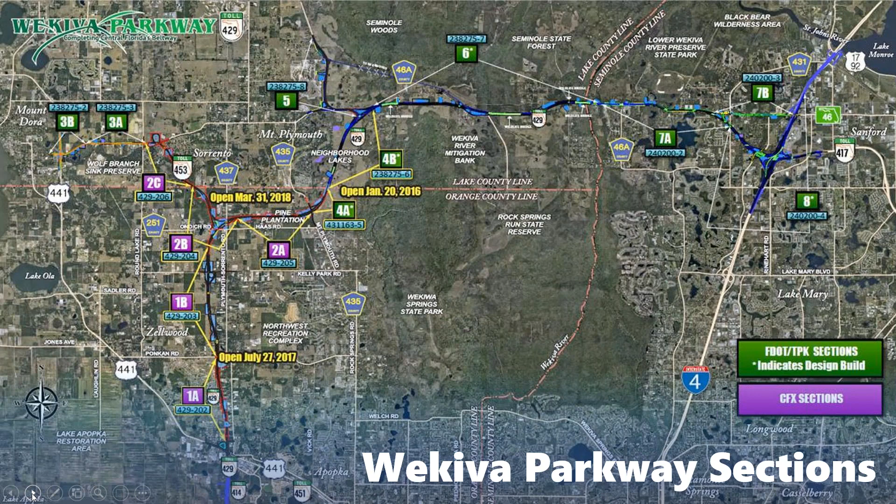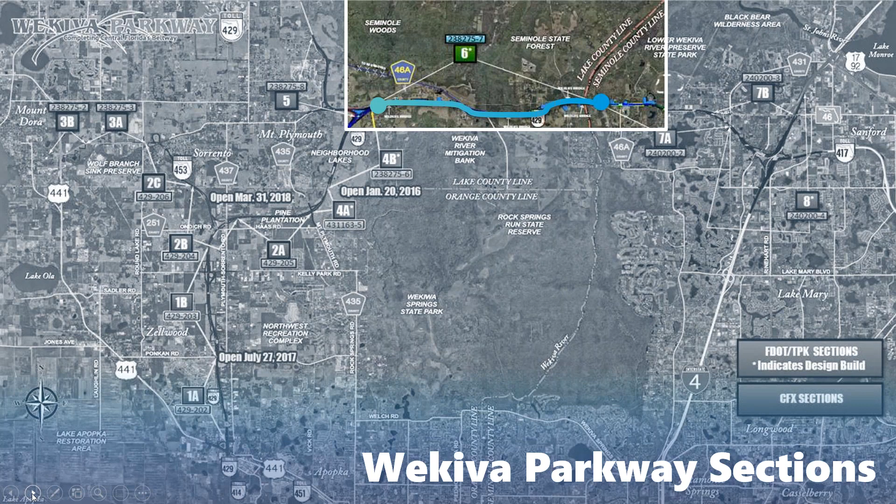So first, for those who aren't familiar, the Wekiva Parkway is a large parkway that encompasses the northwest quadrant around Orlando. It's approximately 25 miles and it's broken up into multiple sections. So today we'll be primarily focusing on Section 6, which is to the top of your screen. This is approximately a 6-mile corridor crossing over the Wekiva River, which is kind of the feature point of today's presentation.

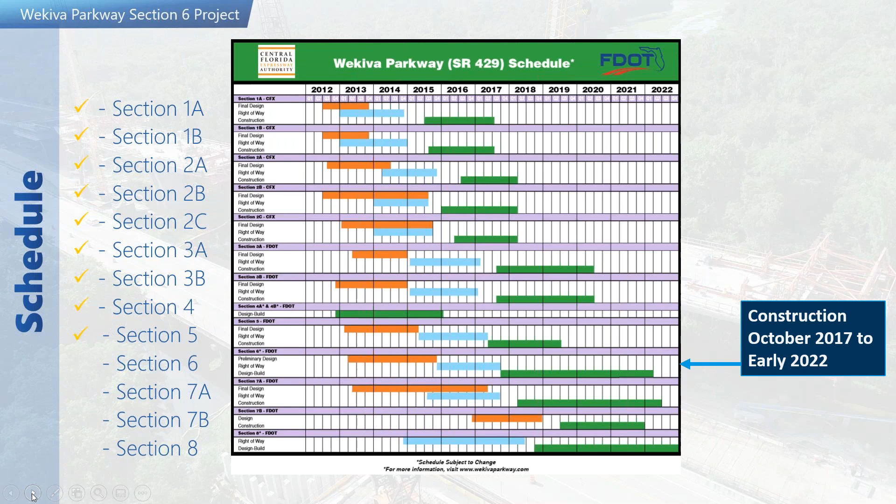The parkway is, again, made up of multiple sections. You can see the sections there on the left that have the check mark. These sections are all completed. Section 6, which we'll be focusing on today, is under construction, scheduled to be completed early 2022. And then Section 7A and 7B and Section 8 are concurrently under construction right now and will finish slightly after Section 6.

Let's look at some details of the project overall. Again, the overall Wekiva Parkway is $1.6 billion, approximately 25 miles. It's that northwest quadrant beltway that will go around Orlando. The Section 6 project is 6.1 miles long. It consists of a limited access toll facility along with a non-tolled service road for local traffic. That was very important, and the department wanted to make sure that there was a non-tolled option for local traffic. All the tolling is electronic tolling. There'll be no toll plazas along the way.

It also includes a pedestrian path and trails. This area is very rural in nature, and there's a lot of hiking and trail walkers that use this facility. It was important that the contractor coordinate with adjacent Wekiva Parkway sections because we have a section on either end of the project. So that's been a real important aspect.

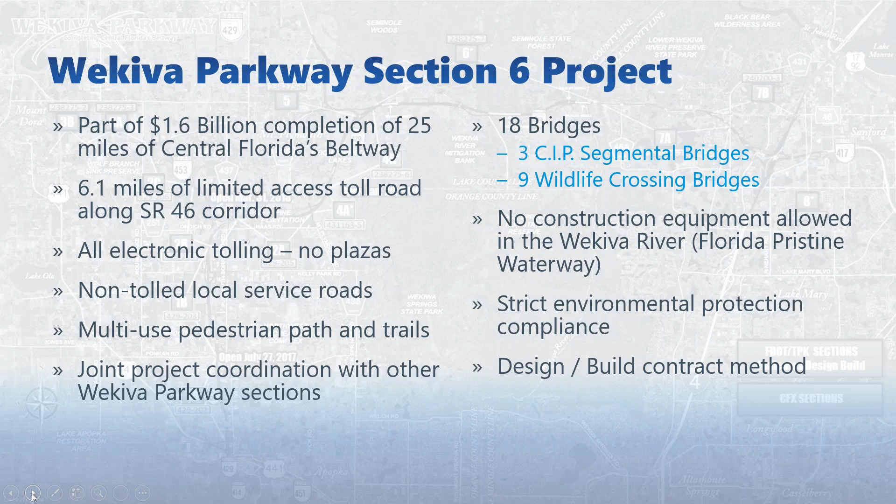There are 18 bridges on the Section 6 project, 3 of which we'll primarily focus on, which are the cast-in-place, balanced cantilever segmental bridges. There are also 9 wildlife crossing bridges and 6 bridges that are over local traffic roadways. No construction equipment was allowed in the river. We've had strict environmental requirements and compliance to those requirements on this project. And this project was designated as a design-build contract method. You can see the corridor largely runs east and west, about an hour north of Orlando.

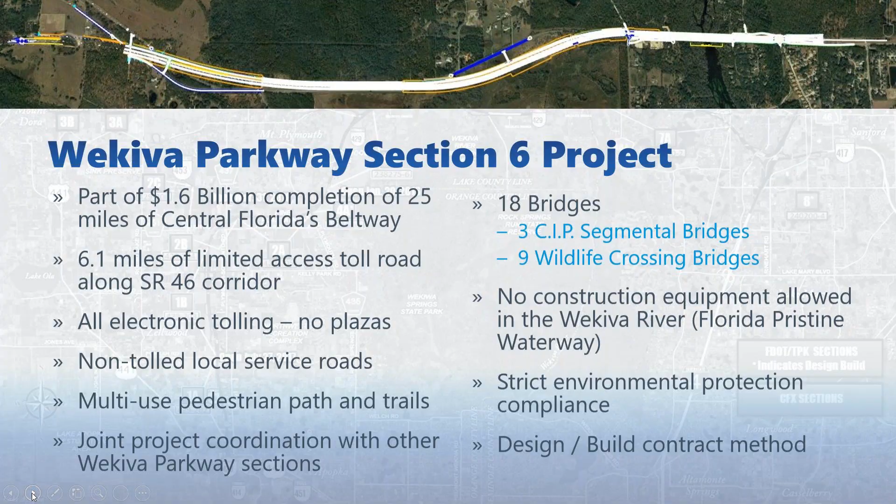Now Garrett's going to talk a little bit about their relationship with Finley and some of the elements of design. Okay, again, good afternoon. I'm going to discuss some key elements of the design process and introduce a few acronyms along the way that some of you may be unfamiliar with.

As Rob mentioned, Finley Engineering Group out of Tallahassee, Florida, is the design partner for the segmental portion of the project. Per the project RFP, or the request for proposal, the design-build team was required to provide an IPR, or independent peer review, at the 90% phase submittal and the final submittal for the segmental bridges, which fell under the Category 2 bridges in the PPM, or the Plans Preparation Manual. The IPR was intended to be a comprehensive, thorough verification of the original design.

The project team is also utilizing the ERC, or the Electronic Review Comments System, to track the entire review process, both comments and responses, for plan reviews and project submittals in a database. All comments and responses reside in one location, allowing any user easy access to all or partial review on demand. The system allows project managers to easily track all comments and responses from all reviewers and consultants at any time during the process.

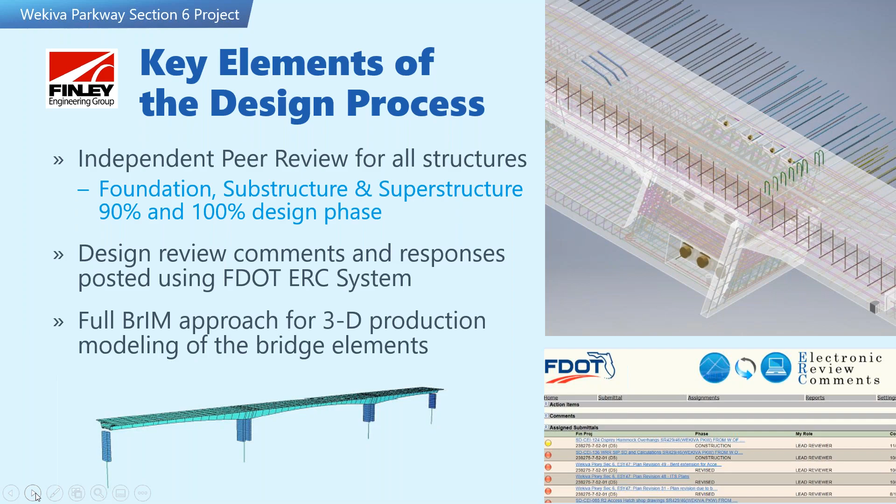The Wekiva River bridges consist of a westbound and an eastbound bridge as part of the tolled State Road 429 Beltway and a non-tolled bi-directional bridge for local traffic. As seen in the typical sections, each bridge includes 2 12-foot travel lanes and wide shoulders with the ability to accommodate additional lanes to the toll roads with future expansion. The local service road also includes a 12-foot sidewalk for viewing of the pristine Wekiva River.

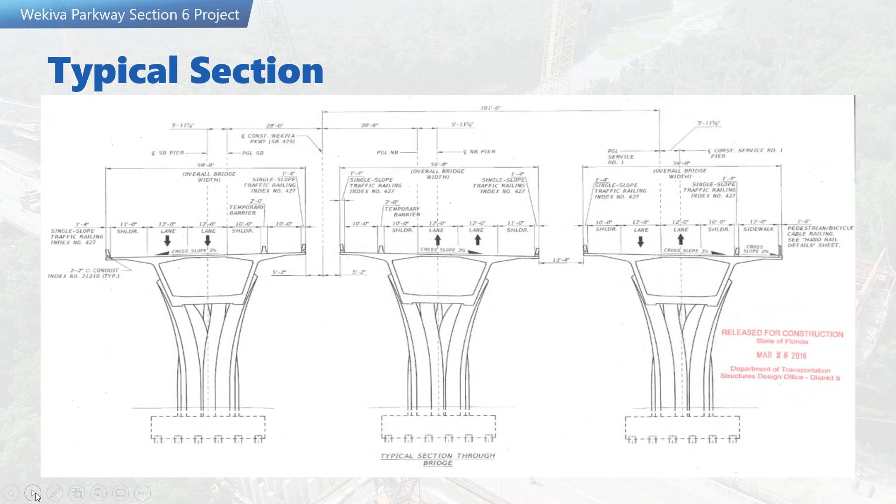The segmental superstructure of each of the 3 bridges is comprised of 2 38-foot long pier tables, 10 16-foot long segments extending downstation and upstation from each of the 2 pier tables, and 2 70-foot end spans that bookend the segments. 3 closure pours between 8 and 9 feet in length join the elements together to complete the full 880 feet in length.

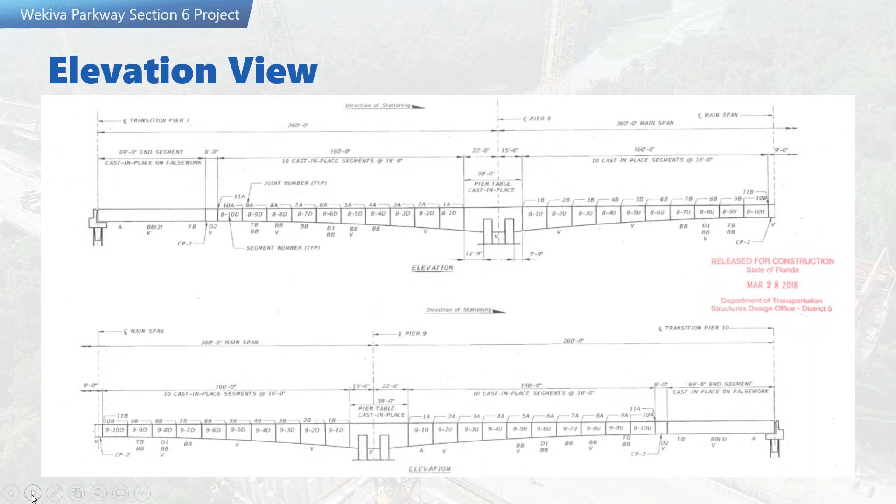So we'll go through a little bit of the foundation and substructure and then get into the good stuff. The 3 Wekiva River bridges accounted for 641 24-inch square precast concrete piles that ranged anywhere from 40 feet to just over 100 feet in length for a total length of 40,000 feet in piles.

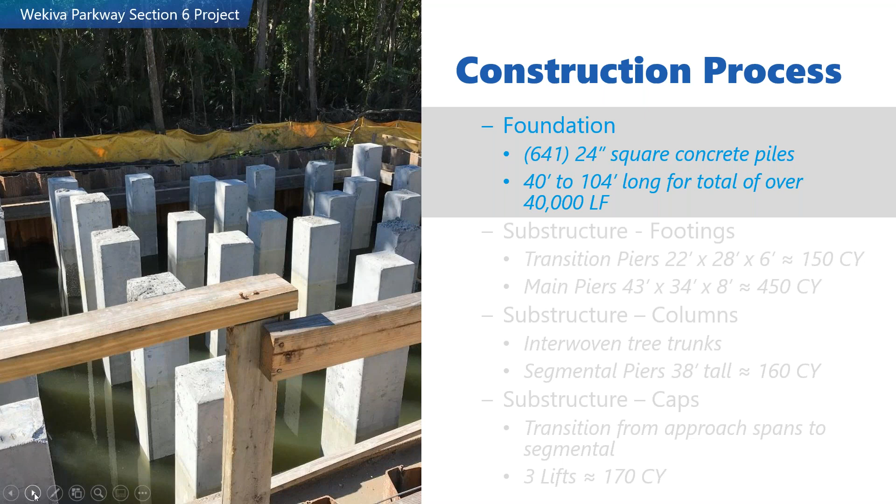All of the substructure concrete placements fell under the mass concrete category, and temperatures were continuously monitored using wireless sensors that provided real-time data to ensure that the concrete cured properly. This included the footings, columns, and caps. Each of the footings for the transition piers were approximately 150 cubic yards in concrete, and the footings for the 6 main piers averaged roughly 450 cubic yards.

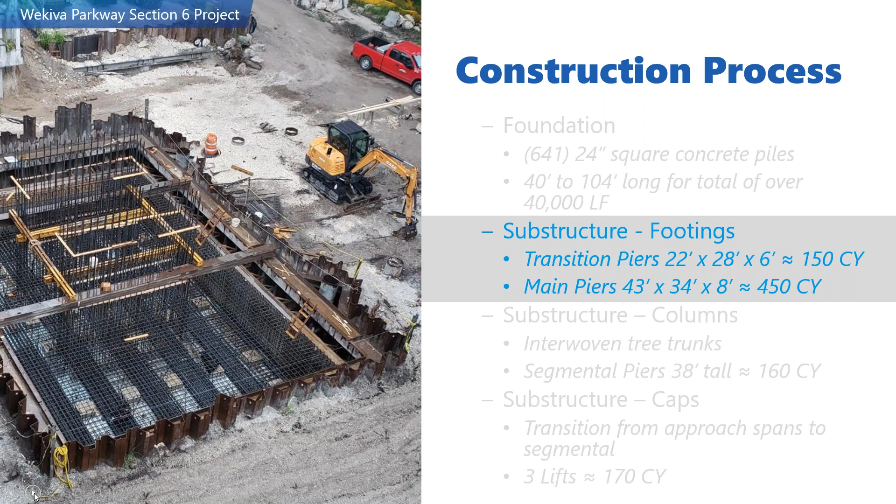The design build team included the use of tree shapes in all piers at the Wekiva River bridges to fully capture the preferred theme of the celebration of trees on the river's edge. We included that as part of the aesthetics package in our technical proposal. The columns for the segmental piers averaged 38 feet in height for a volume of 160 cubic yards.

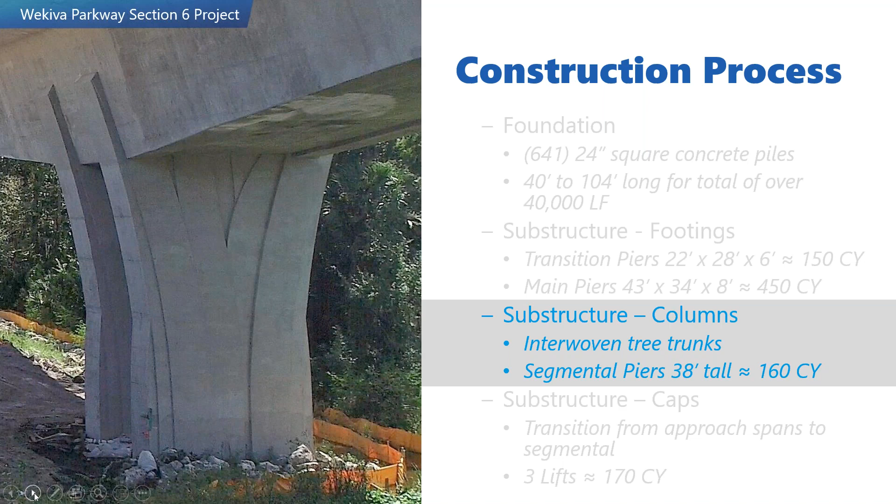The caps cast at the transition piers served as the shift between the approach spans, where you can see the FIB 78 girders in the background, and the segmental spans that begin with the end span. The caps averaged 170 cubic yards in volume, divided out over 3 lifts. The addition of the multi-rotational pot bearings underneath the end spans and the finger joints at the top of the caps allowed for movement between the 2 superstructure types.

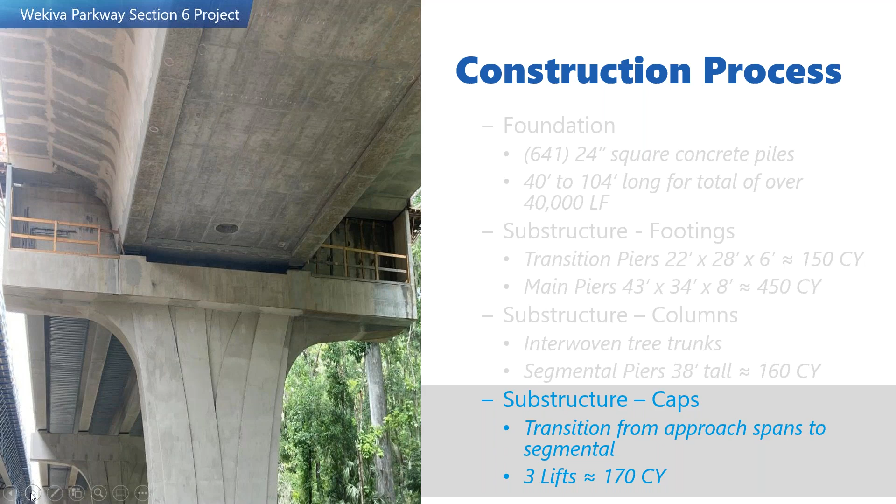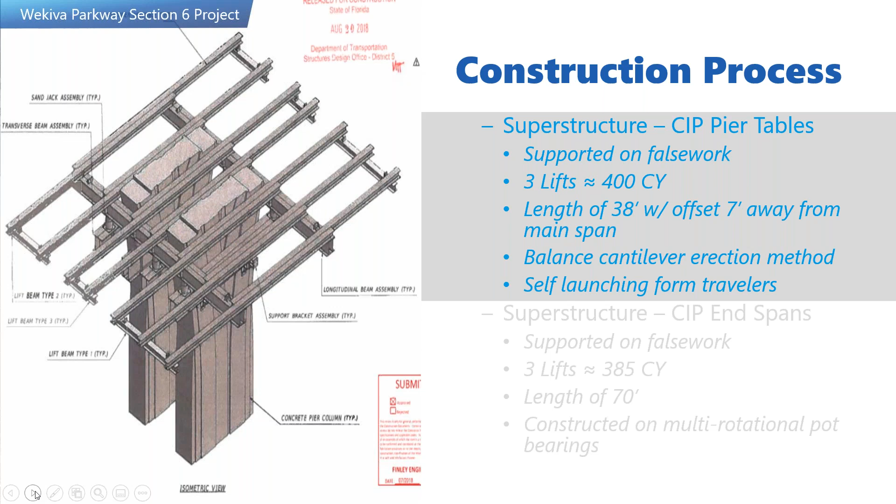The pier tables were cast in 3 lifts. Lift 1 was the bottom slab. The second lift were the walls and the diaphragms, and then the top slab for the final lift, for a total of approximately 400 yards. Again, the pier table spanned 38 feet in length with a 7-foot offset away from the main span over the river as part of the balanced cantilever erection method. Self-launching travelers were erected on top to cast the segments in each direction.

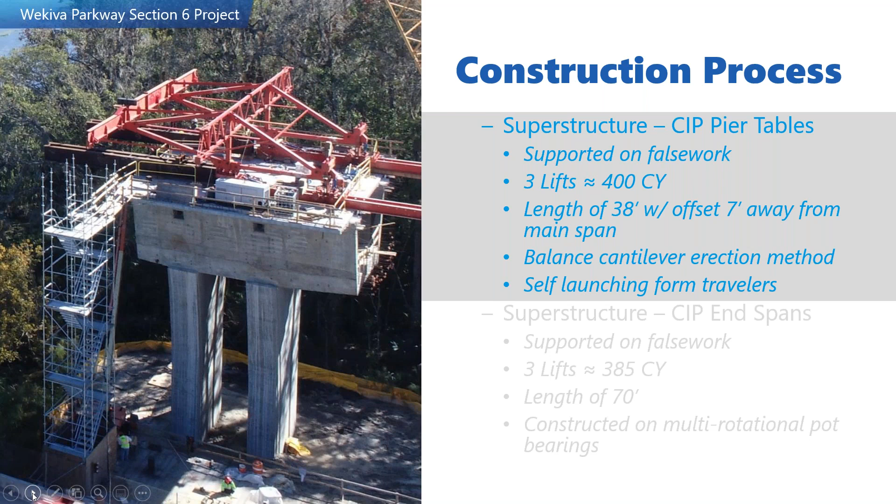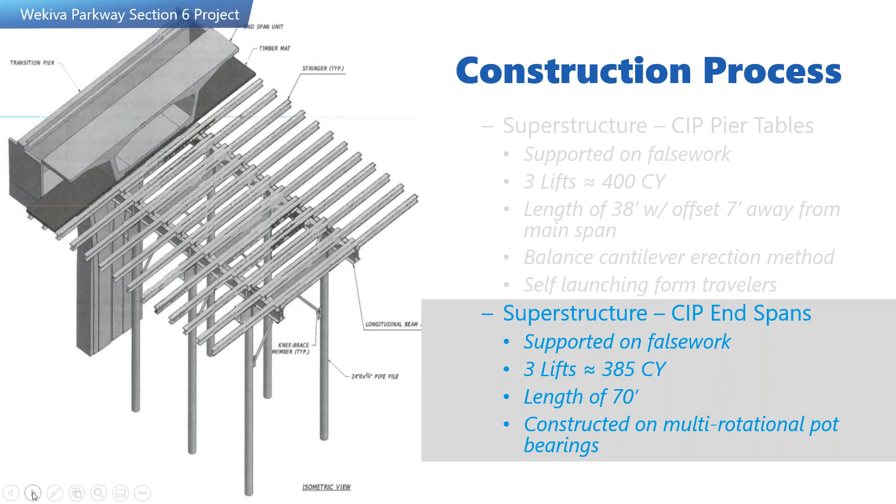The end spans were completed in 3 lifts as well, for a total of just under 400 yards per location. Each end span was just under 70 feet in length and was constructed on the multi-rotational pot bearings to allow for movement.

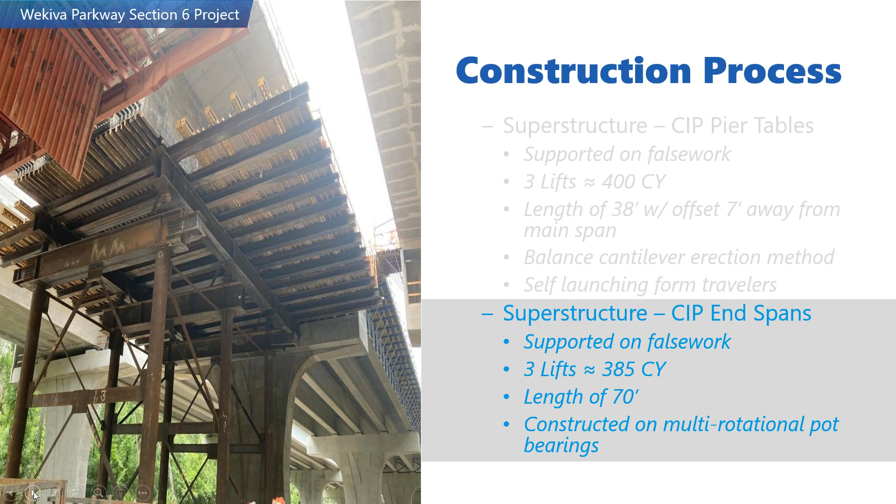As far as the segments, each of the 3 bridges included 40 segments, with 10 downstation from the pier table and 10 upstation from the pier table on each side of the river. The depth of the segments and the base width both varied in dimension from segment to segment. The top deck remained a consistent 60 feet throughout each bridge, and all 120 segments were cast in 16-foot lengths.

Due to the variability in the shape and size of the segments, the concrete volume ranged from 120 yards at each pier table down to 80 yards towards the end spans and the midspan.

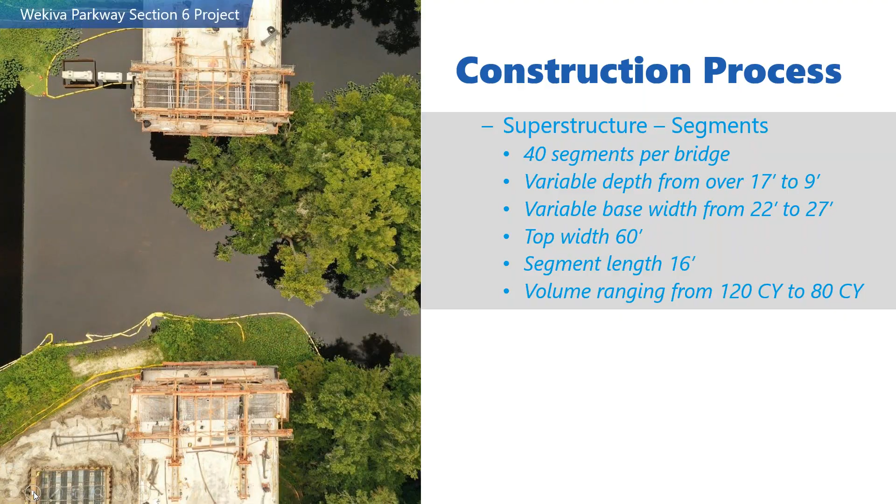All right, thanks, Garrett. As we discussed the cast in place balanced cantilever method, one integral part of that is the form traveler, which you can see in red. The form traveler really enables this type of construction method, and it was chosen due to the fact that there was no equipment allowed in the river, so no bridge foundations. So to really achieve that 360-foot span across the river, this was one of the sole construction methods to achieve that.

So looking at the form traveler, it's made up of different components, as you can see in this schematic. There's a bottom support, which holds the weight of the concrete and the reinforcing steel. And then there's the top support, which supports the top deck. It has variable level work platforms also for the workers.

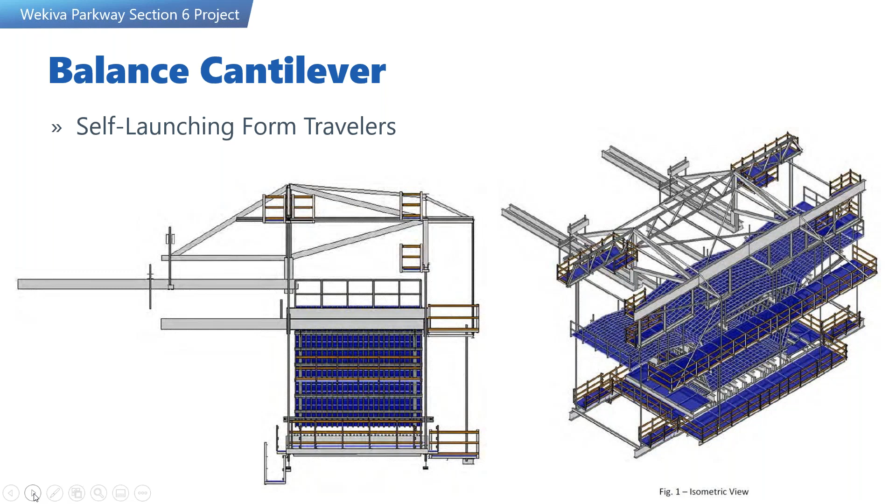From the side view, you can see on top, there's an A-frame. These particular travelers have two of those frames. They're commonly referred to as the horses. And these are what support the overall weight of the segment and the traveler itself. The longitudinal beams in the background are projected forward, and this allows the traveler to move forward or backwards, providing the aspect of self-launching. That way you don't have to have any equipment underneath or above to facilitate this casting.

Now we're going to take a look at a short video that sort of graphically depicts what goes on during balanced cantilever construction.

All right, thanks, Greg, for showing that video. Hopefully everyone got a better idea now of the balanced cantilever cast in place construction method. Moving on, we're going to look at some progress update photos. So last year at about the same time, this presentation was given as a 2020 update. So what we thought we would do is keep the 2020 slides and then sort of show a contrast with 2021 so that the audience can see the progress that's been made in the past year.

So this photo was taken about a year ago with our drone, and you can see the form travelers there in red. There are 2 pairs of them, and they're casting segments for the westbound bridge, which will be part of the toll facility 429. On the right, you can see the service road bridge. The construction is already completed, and it has 2-way traffic, again with that pedestrian walkway on the right-hand side. The middle bridge, construction had just begun for that bridge, and the pier tables were under construction at different stages there.

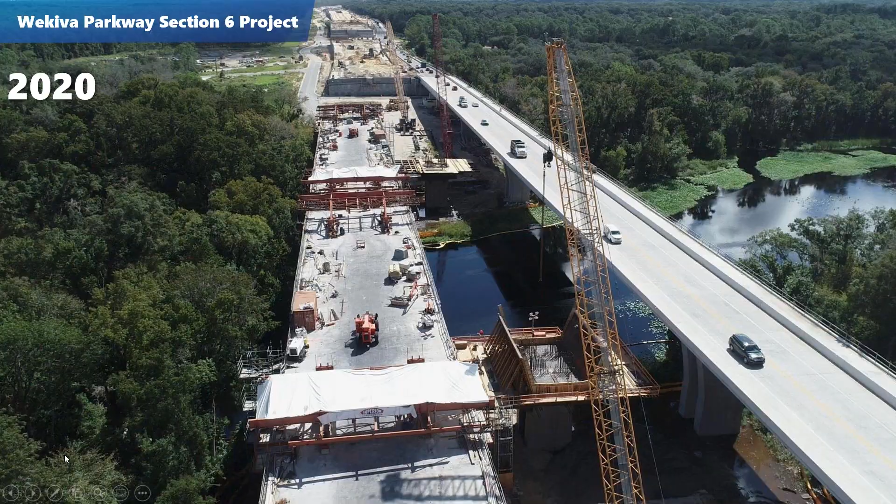So moving forward to this year, you can see now this photo is looking east, and the westbound bridge is largely completed. All the segmental work is completed on that bridge, and the eastbound bridge is nearing completion. Again, this photo shows the 4 form travelers that are casting segments opposite of the pier, with only several, I think at this time there are about 8 segments remaining.

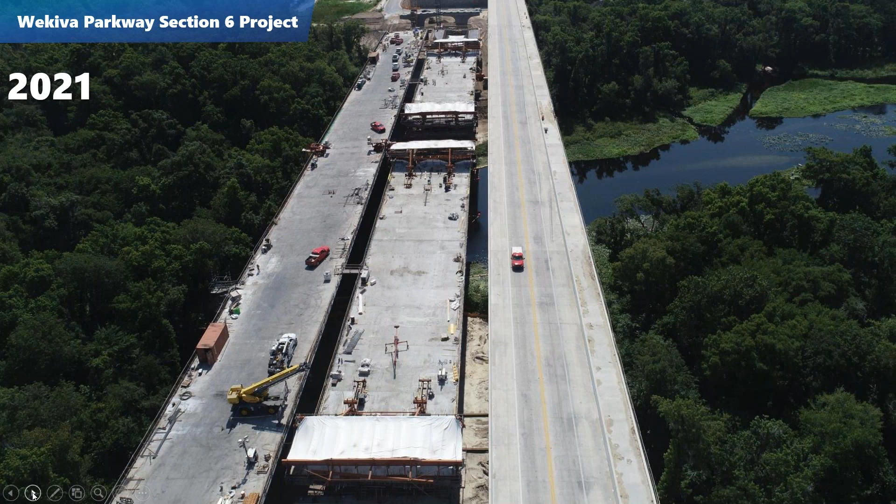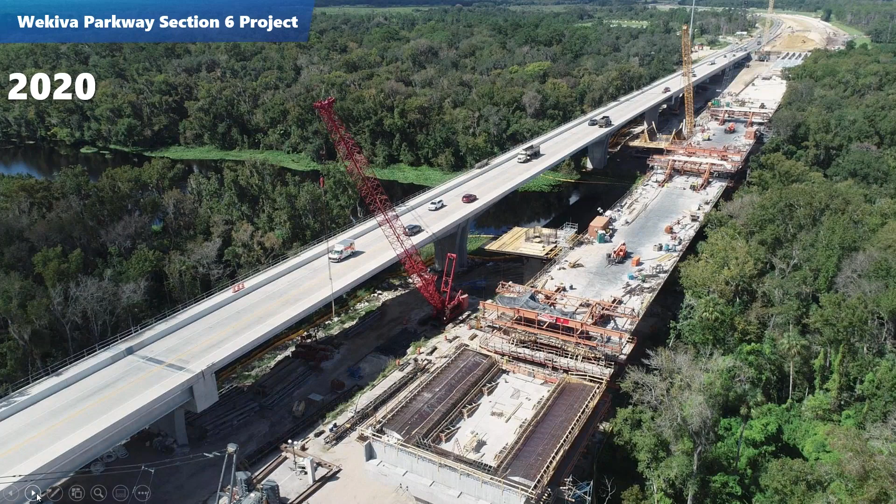So this photo, again from 2020, shows the progress. This photo is looking sort of mostly to the west. You can see the end span segment at the bottom of the photo being constructed. At this time, as Garrett mentioned, that is constructed in 3 concrete lifts. So the second and third lifts are being worked on there, reinforcing steel being installed.

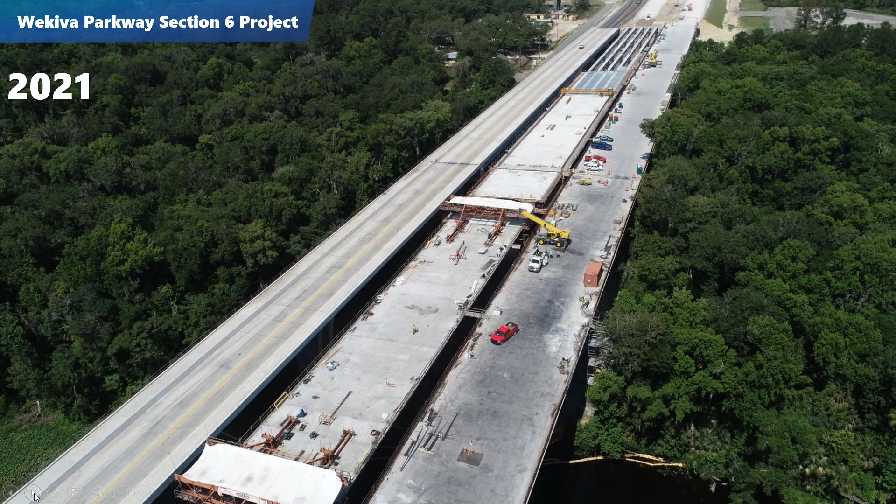This is a good shot of the river underneath, again from 2020. You can see the broad spans of this main span and the fact that there's no intrusion into the waterway with this construction method. In the photo from 2021, currently, all the pier table work is complete. There's a little bit of patching and rubbing going on the westbound bridge to your right, and the eastbound bridge is continuing construction.

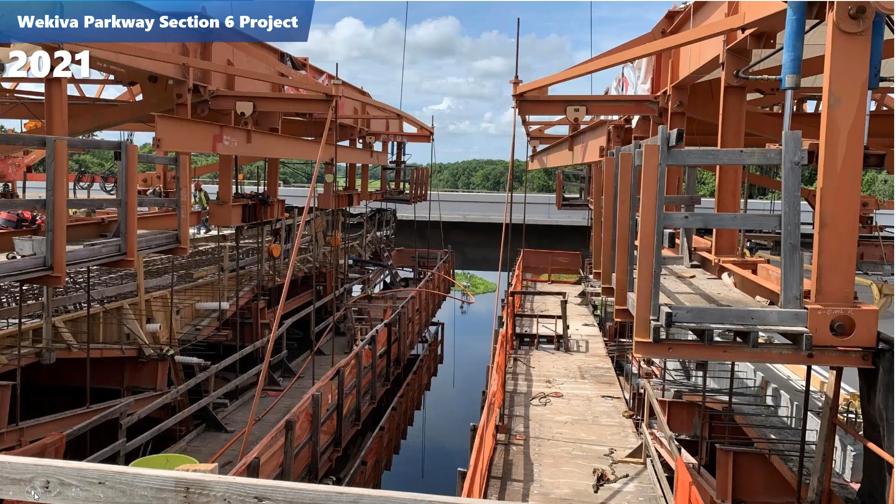This photo shows the progress in 2020 as we're coming into the main span closure with approximately 32 feet left to be constructed. And this photo was just taken several days ago with approximately 25 feet until this main span closure, till the 2 tips of the cantilevers meet.

We also use a wireless weather station that we have mounted on the roof of our office trailer. This connects to a Bloom Sky app that everyone has on their phone. It'll show you a real-time photo of what the sky looks like, as well as temperature, wind speed, humidity. So that's been very useful to have on the project.

If you are away from the project site, at any time you can click on that app and it'll show you what the conditions are, which is very helpful. Central Florida, especially in the summertime, we get these big thunderstorms that roll through. So it helps everyone stay connected with what's going on.

In 2017, we implemented the use of wireless tablets, iPads, and Samsung tablets on the project. This allows the inspectors to do their field work electronically. They can also utilize digital signatures. We didn't realize how important this was going to be until 2020 hit, and we were encouraged to not hand off paperwork from person to person. And so the fact that all our inspectors were already using this type of technology was very beneficial and helped us comply with the safety regulations.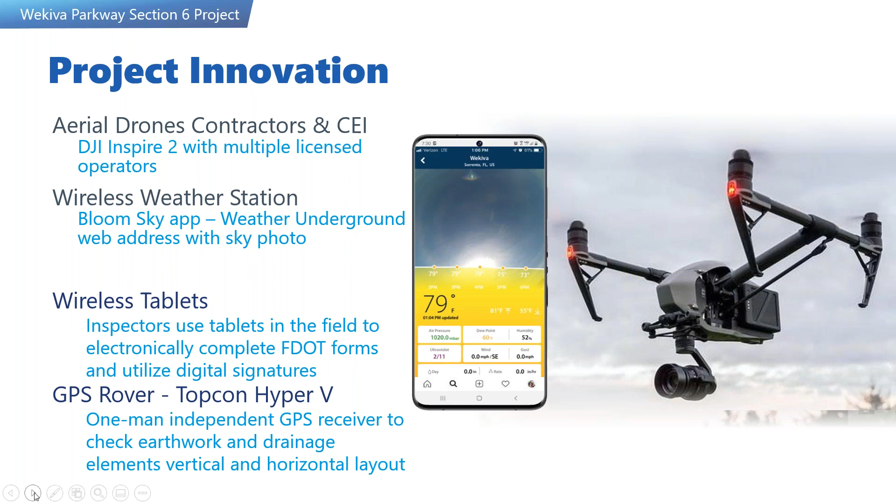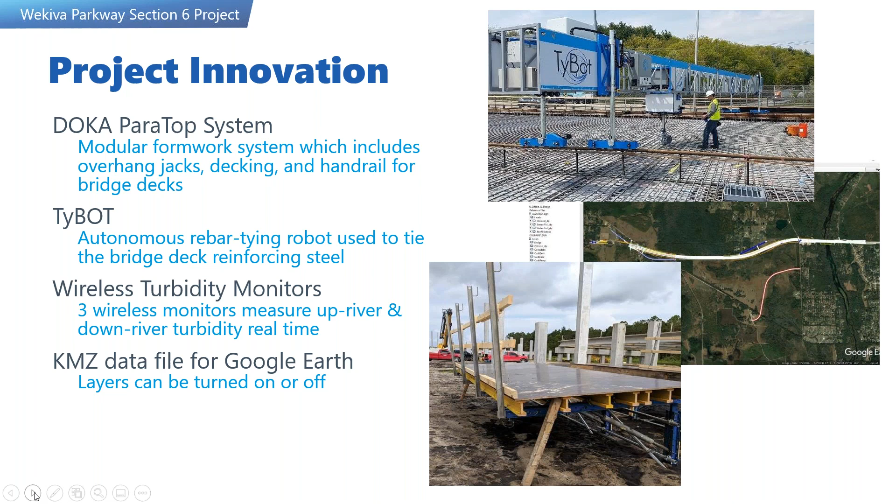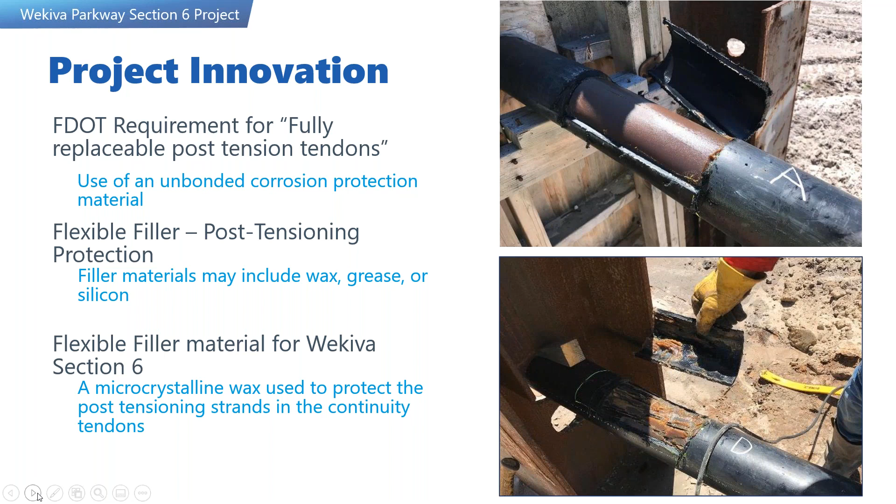But for this project, the FDOT specifications required the use of a microcrystalline wax that's used to protect the post-tensioning strands in these bottom slab or continuity tendons. It has about the consistency of peanut butter at room temperature, but when it's heated up, its viscosity is similar to that of water.

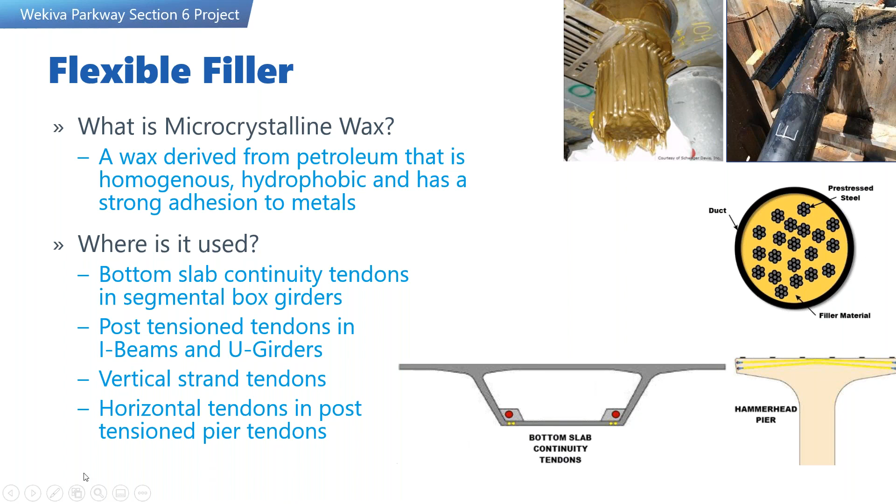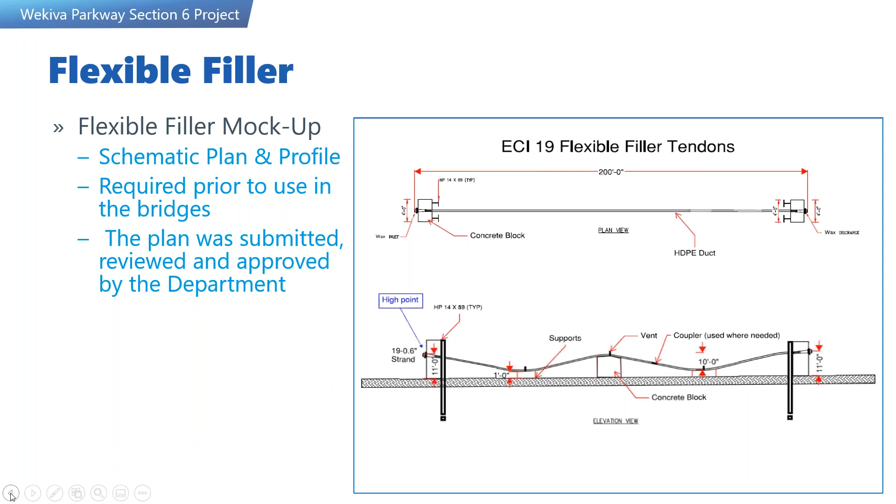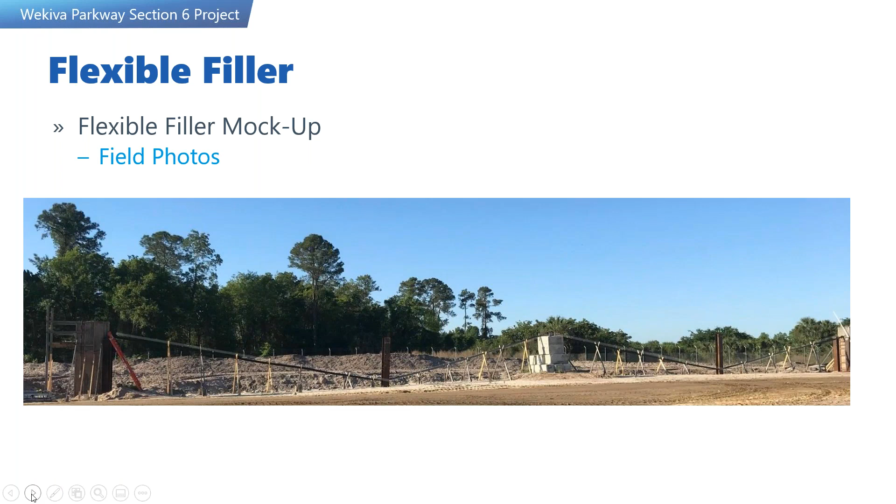So here you can see the scale of this full-size mock-up. Just to give you an idea of the magnitude, this was a large undertaking and took several months for the contractor to complete.

So one of the specification requirements was that the tendon had to have force on it. So they wanted the strands to behave the same way in the mock-up that they would in the bridge. So if you just laid strands in there and they laid on the bottom of the duct, then that wouldn't really be reflective. And so they did require force to be applied to this 19-strand tendon. And again, it took about 3 months for the contractor to complete this work.

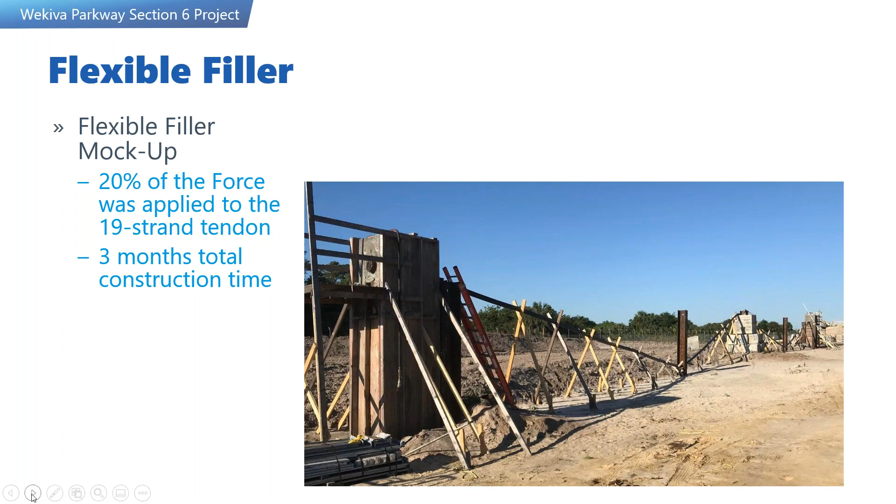So once the tendon was filled with flexible filler, the next stage was to cut up the duct in various locations and analyze if the tendon was full, if we had any voids, if we had any air bubbles that were produced as the result of injecting this material. But there had to be a lot of thought given on how to remove these portions of the duct. If this was a grouted tendon mock-up, then the contractor would just go out with the gas-powered chop saw and they could just cut it up in various locations.

The problem with flexible filler, though, if you took that same approach, you would heat the material as you're cutting through the strands and you would begin to mobilize that filler, and so you wouldn't end up with an accurate picture of what the flexible filler was in its environment at the time it was filled. So for this reason, the contractor had to use a small circular saw that was a low abrasion cutting saw, enough to cut through the duct, but not to heat the material.

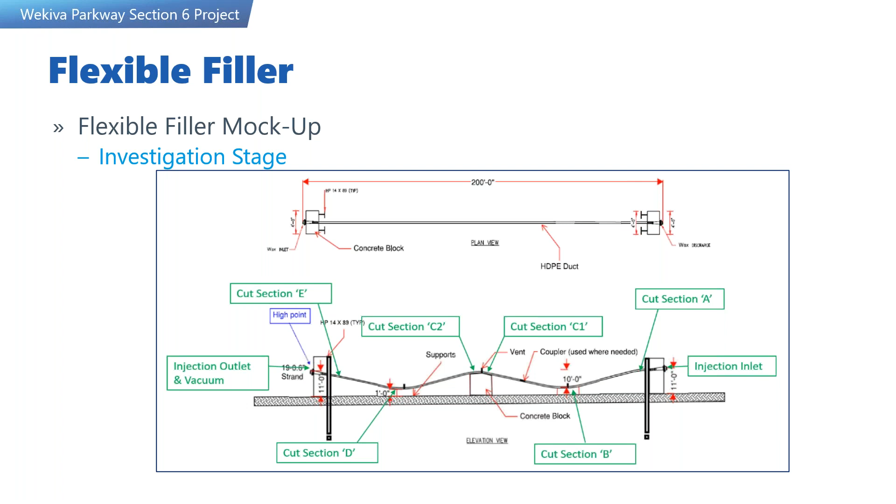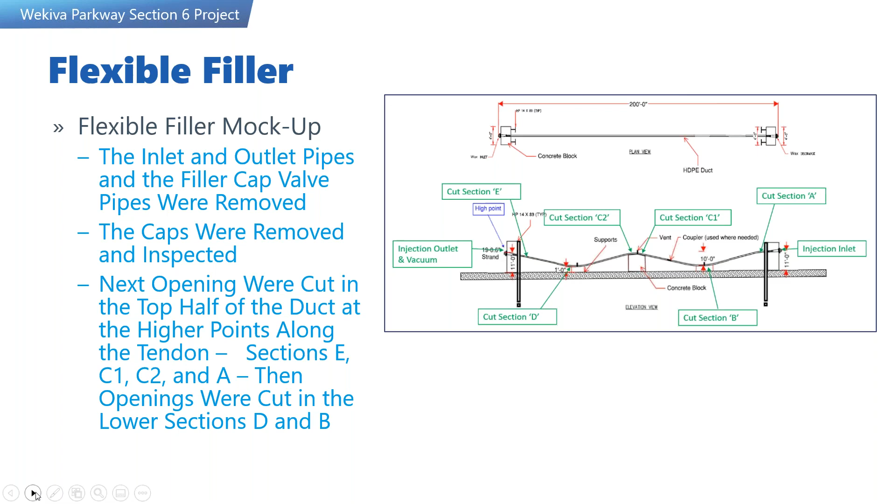So again, what we want to do is be careful how we removed these sections. This mock-up was performed during the summer, and that black HDPE duct would reach about 125 degrees in the sun. So we made the decision to remove any of the portions that were in the top region of the mock-up. So that would be section cuts A, C, and E. And then after we had a chance to observe those, then we would cut the bottom portions, B and D.

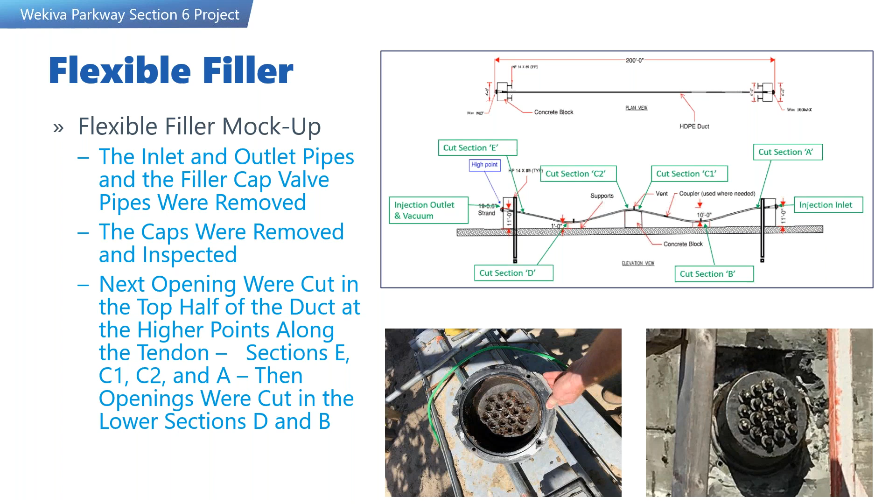So here are the photos of what the wax looked like when we were able to remove those portions of duct. They were full in each location, which was a very positive sign for the team. You can see how the wax sort of encompasses all parts of the strand, and that was really valuable for protecting the tendons.

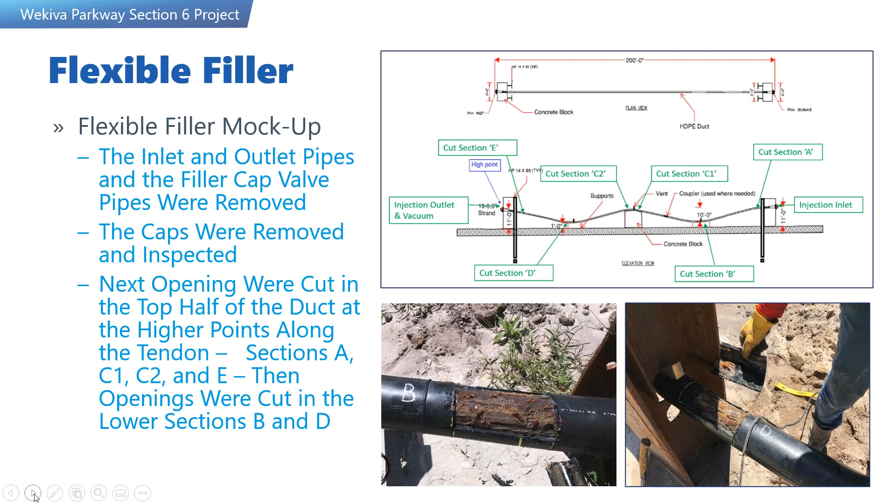So our mock-up conclusion was that yes, this mock-up, it was a complex profile, but again, we didn't want to just go out and lay a duct on the ground. We wanted something that would mimic or mirror what was going to be flexible filled in the bridge. That's why this profile shape was chosen. Also, we realized that it was important to vent both of the caps, both on the inlet side and the outlet side. Even though you're using the vacuum assist on the outlet, it's important to vent those caps so that you don't have trapped air.

Also, we learned that at the inlet side, if you have a small leak, you can quickly stop that leak using ice cold water and ice cold rags. So in the end, the mock-up was a success. We had several engineers down from FDOT's central office from Tallahassee, and some observed the filling of the tendon, and then several others observed the autopsy, or the cutting and removal of duct.

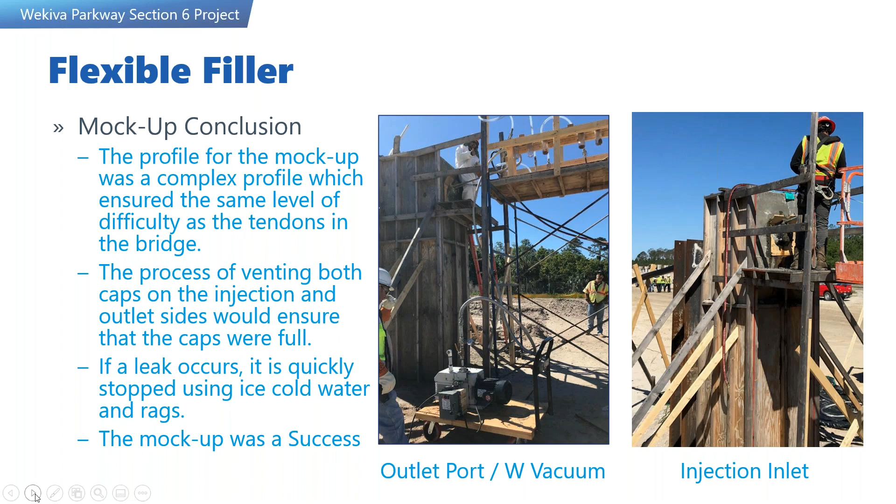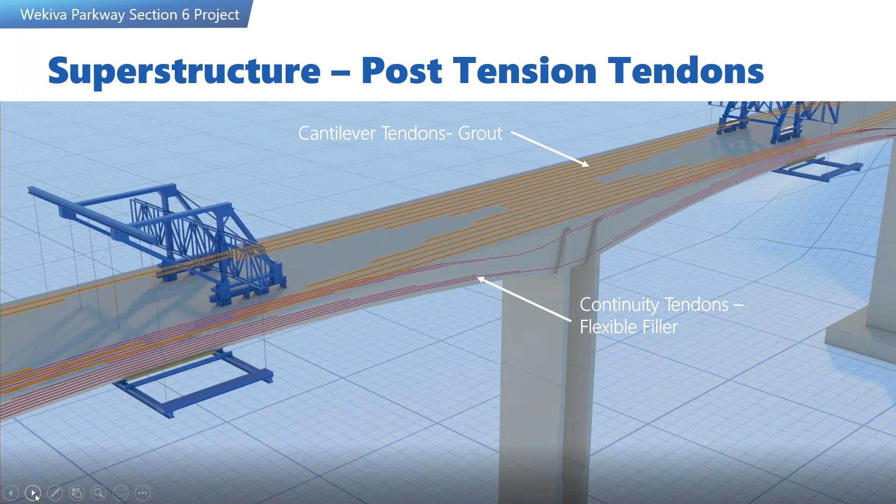So now looking at the tendons in the bridge, now the mock-up has been completed and approved. You can see the tendons on top are the cantilever tendons. These are used largely to support the construction loading. These are still filled with grout because they're in the top slab of the segment. However, the continuity tendons, which are bottom slab tendons, these are the ones that were filled with flexible filler.

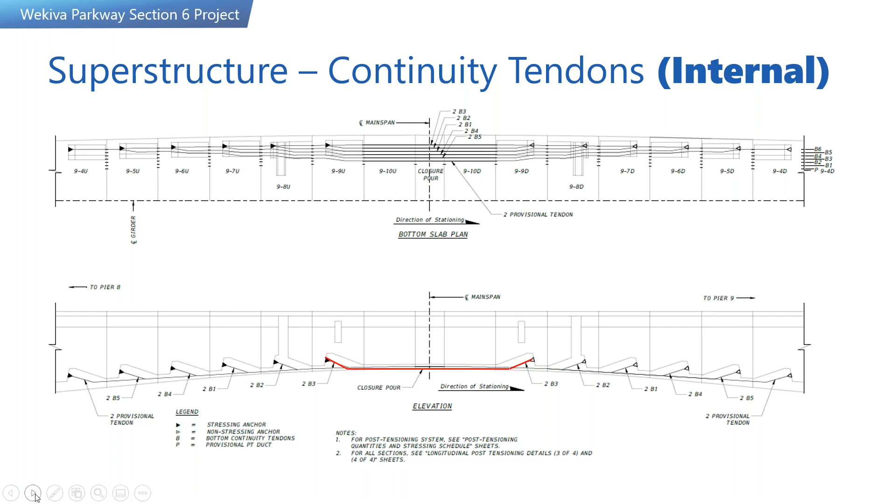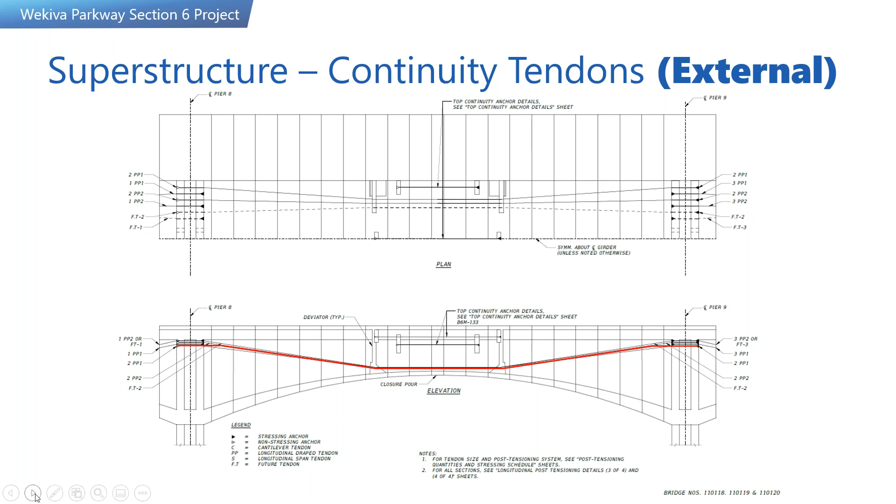We also had the continuity tendons that are external. These are HDPE duct tendons that are inside the box of the bridge, and these are the drape tendons. These are the ones that we had to make sure that we had no voids or no trapped air during the filling process.

Garrett, you want to talk about some of the equipment that's used in flexible filler? Sure. So the next couple of slides give an idea of what equipment is needed for the flexible filler operation. Superior set up a flatbed trailer to move the equipment around as needed. The trailer included 4 510-gallon tanks that hold the flexible filler, as seen in the picture.

The holding tanks were equipped with a heating system capable of producing a melted wax free of lumps within the temperature limits specified by the project specs. The system applies a uniform heat to the wax to avoid locally high temperatures that may damage the wax or the container itself.

Each time we injected, we were required to have 25% more than the total quantity to fill the duct and anchorages, discharge at the outlets, fill the pumping equipment and hoses, and still maintain an approximate 10% of wax in the holding tanks during the operations.

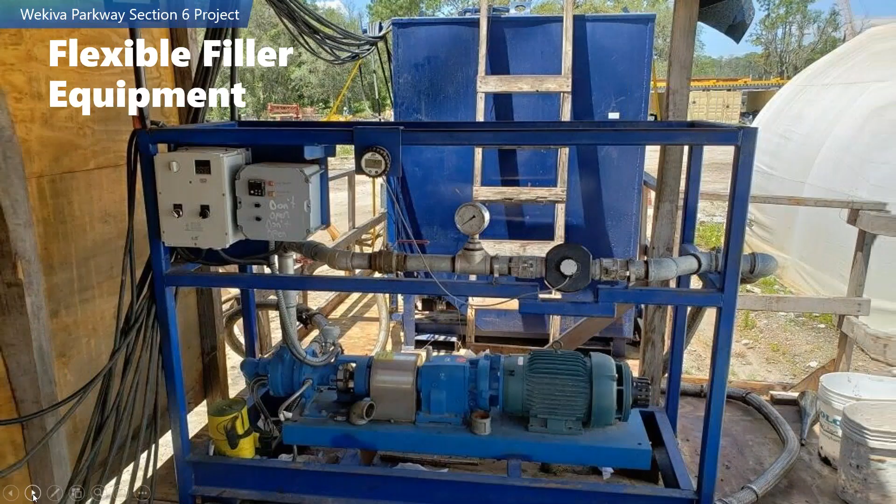The end of the flatbed held the pump with all the necessary connecting hoses, valves, and pressure gauges. The pump had to have sufficient capacity to ensure that all the ducts can be filled and vented in the allotted time specified by the manufacturer and spec. The pump maintained the same pressure of at least 75 psi as it was injected. It must also be outfitted with a valve that can close off the flow to the system once the injection was completed.

Specs called for a positive displacement pump that could provide an injection of filler into the duct at a range of 40 to 70 feet per minute. Once all the equipment was installed on the flatbed, we had a certified electrician come out and install a panel box for us to run all of the equipment.

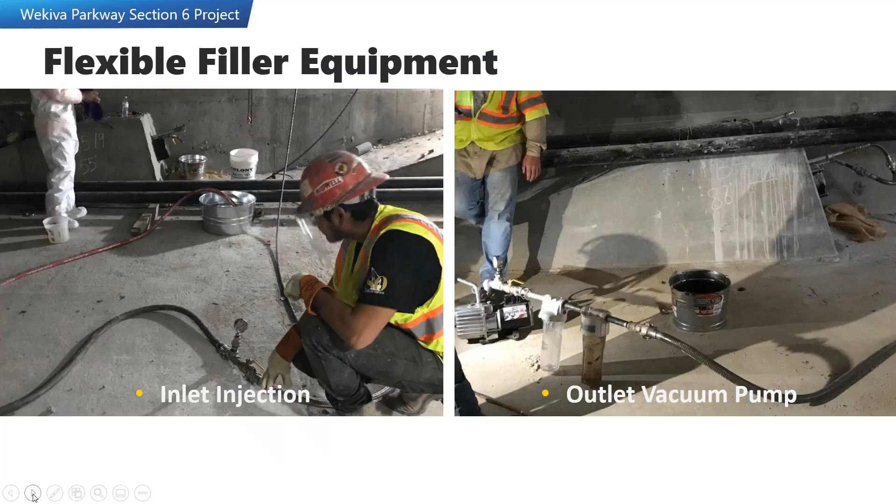As far as personnel on site, DOT specs required that the contractor conduct all wax injection operations, repairs, and inspections in the presence of the filler injection foreman, the filler injection QC inspector, and the engineer. A PT system vendor installation technician certified by the vendor as having sufficient knowledge and expertise to oversee the operation was required to be present for all activities for a minimum of the first 2 days. Superior chose to certify our foreman, 2 field engineers, and 2 additional members of the crew.

To give you an idea of the flexible filler quantities for the Wekiva 6 project, we included one of the tracking sheets for the service road bridge. All 3 bridges had similar tendon layouts and quantities. Those shown are for flexible filler only, and these quantities do not include grout. So the length of the duct for the bottom slab and pier-to-pier tendons came out to a little more than 8,100 linear feet, or more than 24,000 linear feet in total for the 3 bridges.

Between the 619 and 622 systems that were used, the total length of strand came out to 162,000 feet per bridge, or just under 500,000 feet total. And then the volume of wax used was roughly 3,300 gallons for a total right at 10,000 gallons. And just keep in mind that each of these quantities were theoretical and did not include waste. So we had a little bit more of the duct, strand, and wax.

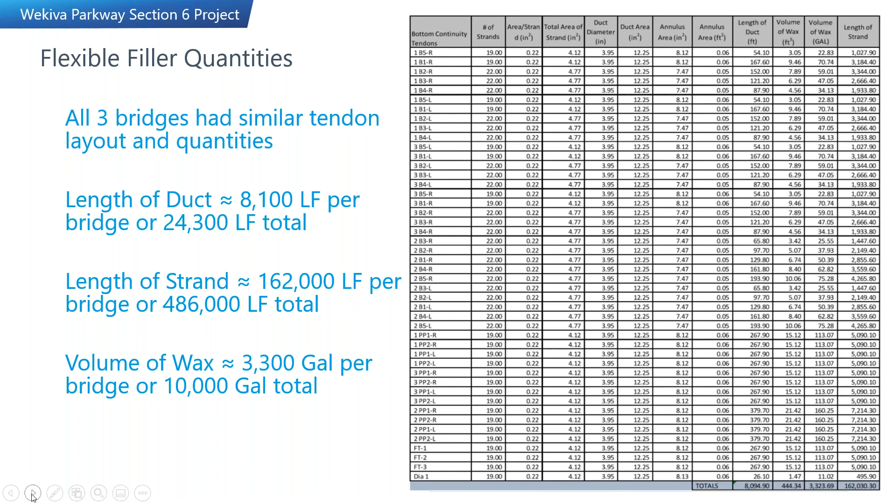Thanks, Garrett. So what testing is required for this flexible filler wax? Well, really the only requirement is you're taking the temperature at the inlet. You're also trying to predict at what rate that wax is going to cool as it travels through the duct. If this was a grouting operation, you have multiple tests that have to be run for flowability and wet density and unit weight. But because the wax comes as a pre-manufactured product, you simply heat it up, check your temperature, and start injecting.

The lessons learned, I would say, on our side is that the heated wax flows much faster than grout. As Garrett said, 40 to 70 feet per minute. So, you know, on a 150-foot tendon, you better be ready when they switch the valve on to start pumping. Also, the heated wax will leak from a much smaller hole than grout will.

So during the air test prior to filling, even if you meet the specification requirement for the amount of air loss, we found that you have to address any leak, no matter how small, so that you can avoid any problems during the filling operation.

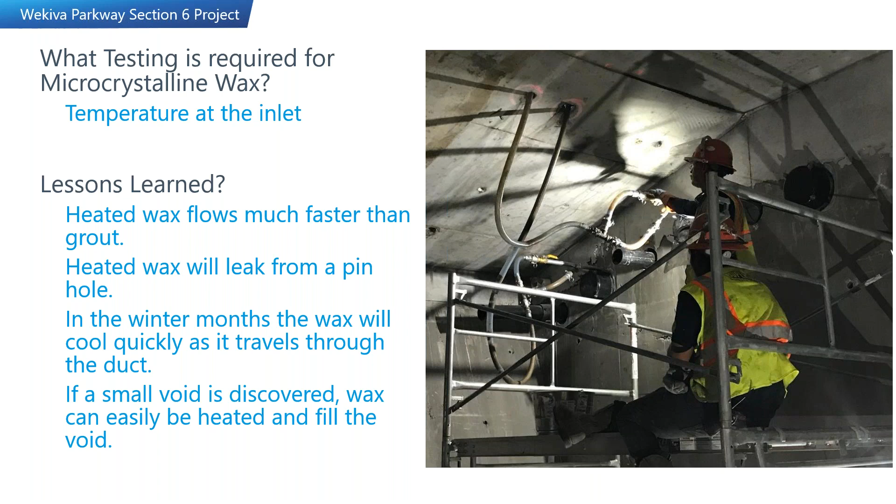And we would use the camera also to track the progress of the flexible filler as it's traveling through the duct and try to ensure that we didn't have any cold spots along the way.

So I listed a few comparisons here when looking at wax versus grout by the numbers. When comparing wax per gallon to grout per cubic foot, wax is about 2.5 times more expensive per volume than grout, just for the product itself. On the other hand, there's much less waste when using wax than grout. A lot of this has to do with the testing. As Rob mentioned, the only testing required for the wax was the temperature at the inlet.

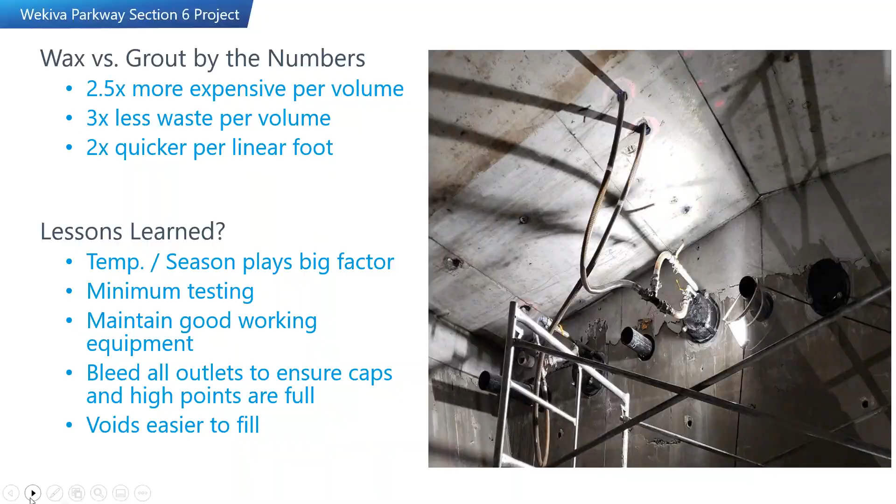So with that said, that wraps up our presentation on the Wekiva 6 project update and the flexible filler tendon protection. At this time, we'll take any questions you may have.